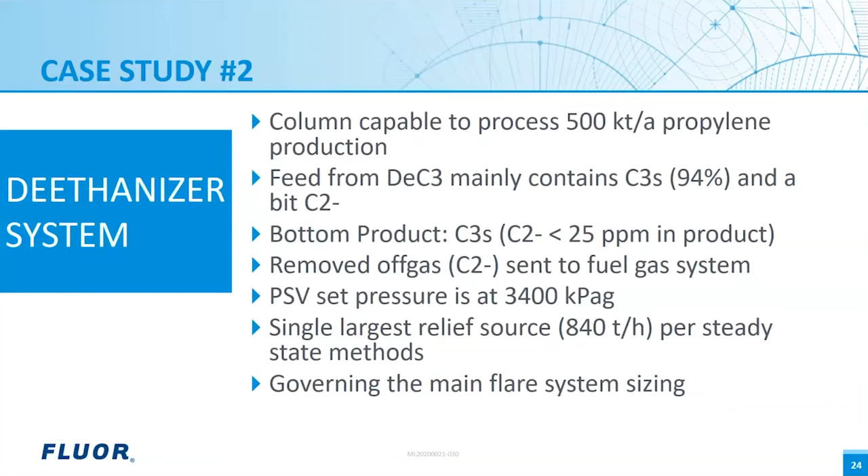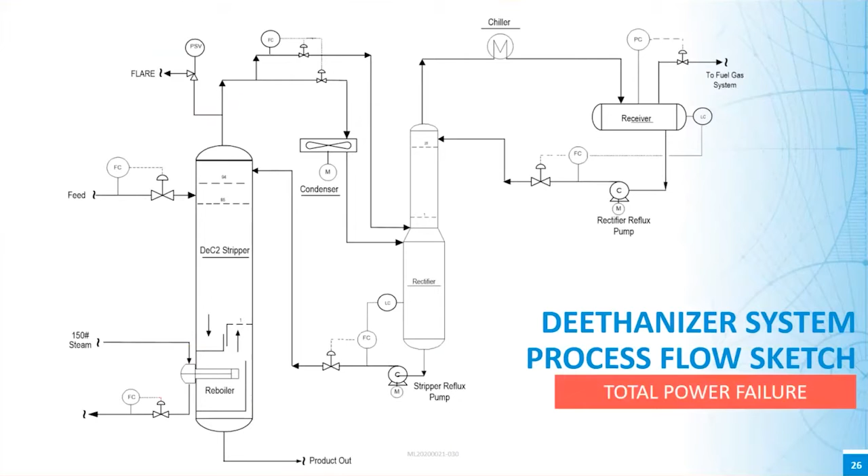Total power failure and partial power failure are also studied here, as they are identified as having the two largest relief loads by the steady-state method. Upon the total power failure, the feed stops, and both stripper reflux and the rectifier reflux stop as well. Bottom products continue on level control and eventually will stop when the column runs dry. Off-gas is assumed blocked as the fuel gas compressor is off.

Both stripper condenser and rectifier chilling condenser are lost. Heat input to the reboiler continues with thermal limitations, as the steam is assumed to continue its normal flow. Reboilers are modeled as a UA exchanger rated with a fluid circulation rate, which will be limited by the reboiler system hydraulics during the upset scenario.

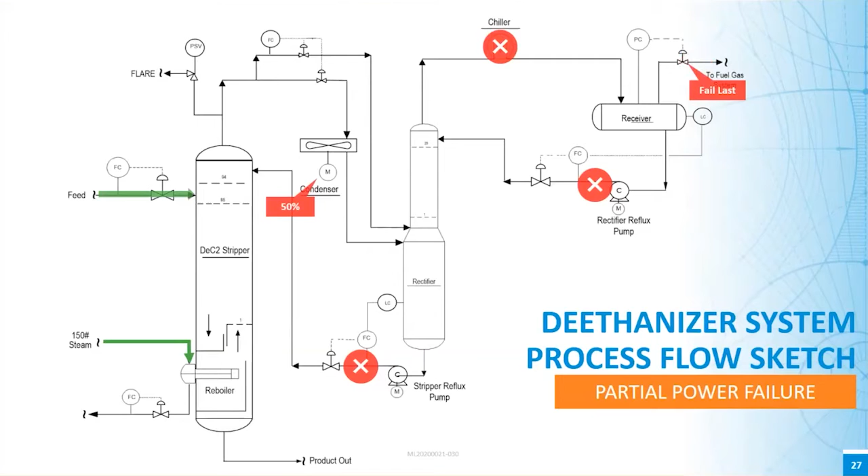The partial power failure case is assumed to have a similar upset to the total power failure scenario, except that the feed continues, as the feed pump is assumed working on partial power failure. 50% of the electric fans on the air cooler are still available for cooling the overhead vapor. Off-gas continues to the fuel gas system with a pressure control valve on fail last position, assuming the downstream fuel gas system is still operating normally.

Dynamic simulation indicates it takes about 11 minutes for the system to reach the PSV set pressure, which is 3,400 kPa. The peak relief of 288 tons per hour is identified at around 20 minutes after the total power failure event initiated. Since the feed stopped, the holdup liquid flow from the top tray section to the reboiler tapers off, and the heat input to the column will eventually stop. As a result, the relief will stop once the liquid holdup on all the trays starts running out.

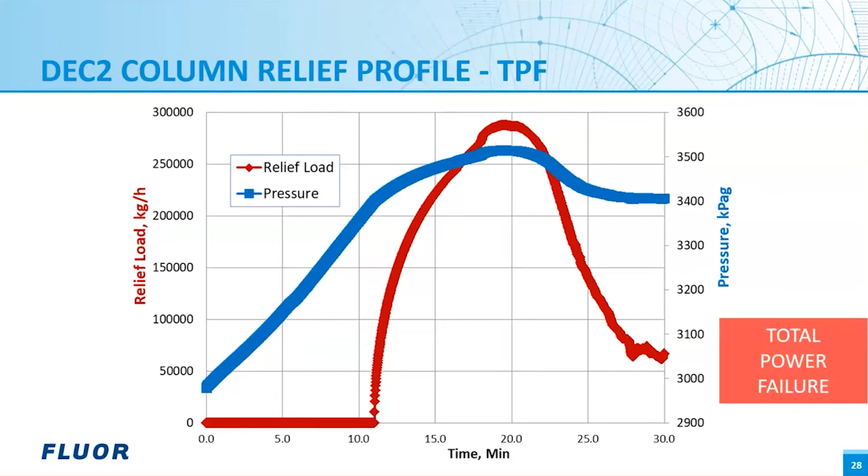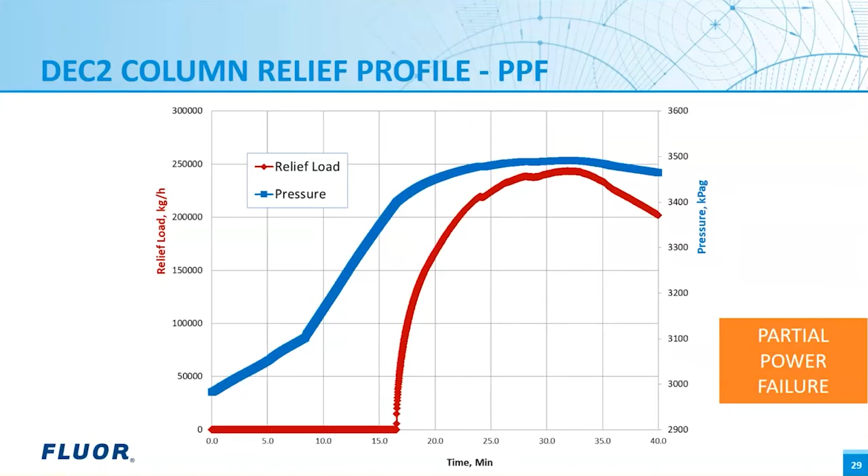The dynamic simulated relief loads are compared with the loads estimated by the steady-state method for total power failure and partial power failure. For a 500 kilotons per year propylene production, the dynamic simulated peak relief is only 1/3 of that estimated by the steady-state method for total power failure. On the other hand, about 50% reduction is achieved by dynamic simulation for the partial power failure case.

Based on the dynamic simulation, one R-size PSV is adequate to handle both total power failure and partial power failure upset. However, the loads estimated by the steady state method will call for two PSVs, one R-size and one T-size.

As we mentioned, the relief from the deethanizer column determines the dimensions of the flare system. The reduced relief loads by dynamic simulation will have a significant impact on the flare header sizing, flare knockout drum sizing, as well as flare stack sizing. The potential savings in CapEx can be tens of millions of dollars, not to mention the benefit on acoustic-induced vibration issues of discharge line and flare headers due to these reduced relief loads.

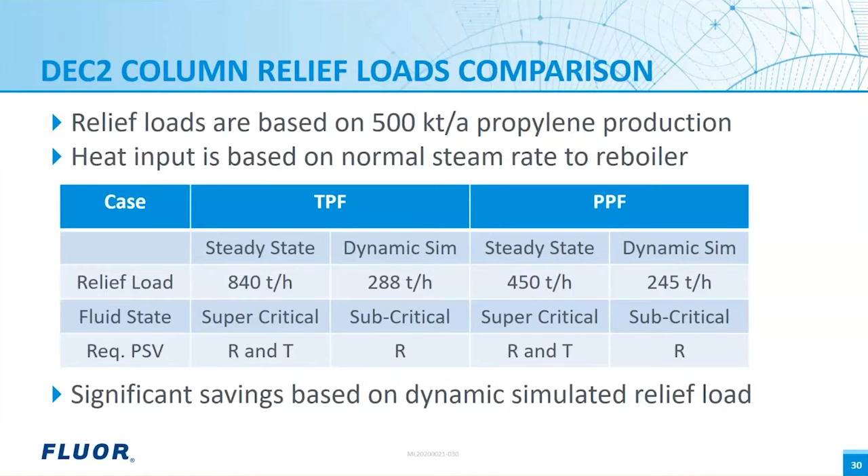The reduced relief loads by dynamic simulation are attributed to the listed advantages of the dynamic simulation. Here, dynamic simulation considers limited liquid holdup within the system. It takes credit for system volume. It simulates the hydraulic and thermal limitations of the system during the relief. Particularly, dynamic simulation indicates the relief is subcritical, where the steady state modeling assumes supercritical relief.

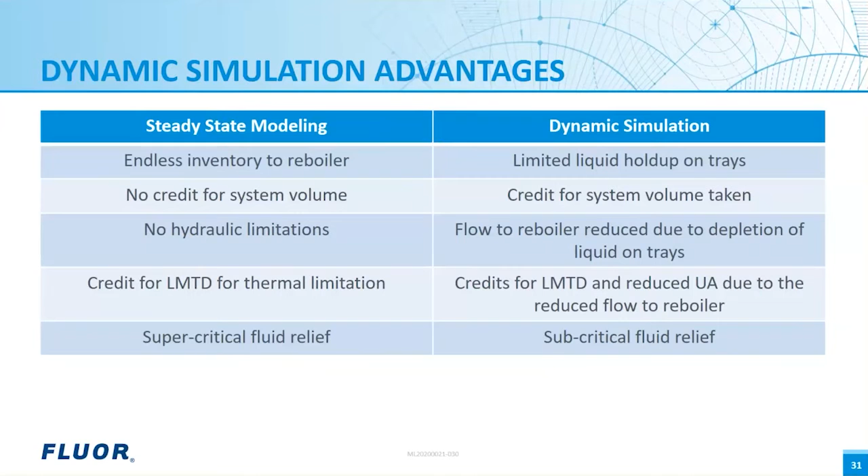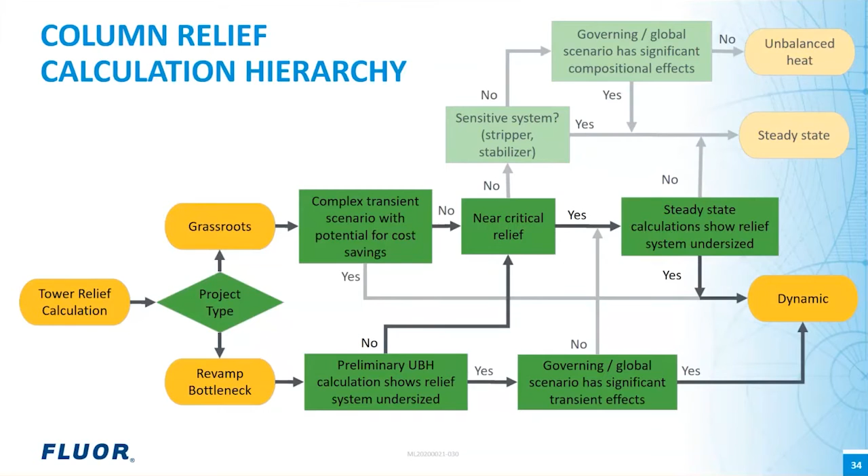As shown by the paths on the bottom section of this diagram, dynamic simulation will offer a rigorous and more accurate approach for column relief estimations. Although the method itself can be used in grassroots design, there is nothing wrong to use it. But the advantages of dynamic simulation are pronounced for the brownfield projects, where the loads estimated by the steady-state method can exceed existing PSV limits or flare limits.

To summarize, here is when and where dynamic simulation should be used. When the column system is not suitable for unbalanced heat method. When unbalanced heat method or steady-state simulation calculated loads exceed the PSV or flare limits. When the impact of the transient changes becomes important for relief loads, for example, the hydraulic or thermal limitations become significant during the relief. The relief loads estimated by the dynamic simulation are typically less than the loads by the static method, not always though. Dynamic simulation is a promising tool to ensure safe design and to save project cost.

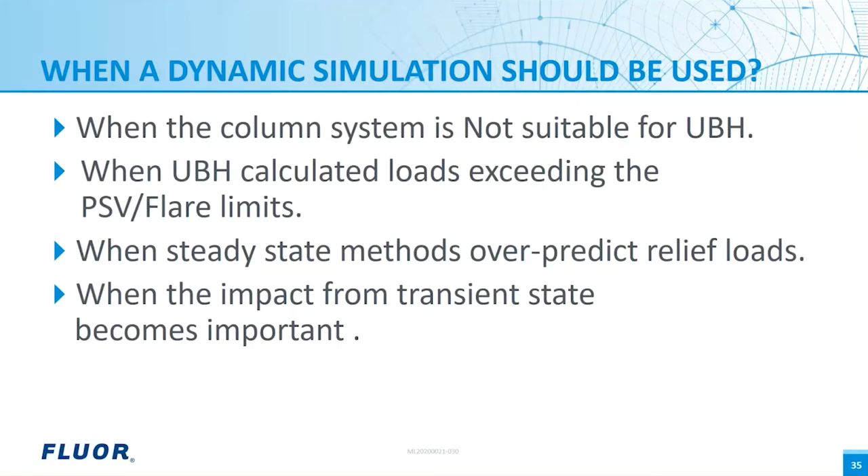For the first question, besides column relief analysis, what other applications of dynamic simulation can you recommend? In addition to column analysis, dynamic simulation can be used for many other process validations and evaluations, such as unit emergency depressuring, control safeguard evaluation, exchanger tube rupture safety checking, compressor anti-surge analysis, and plant optimizations.

A paper of mine to be published in Hydrocarbon Engineering next month will give you a good example of plant configuration optimization with dynamic simulations. In that paper, we used dynamic simulation to evaluate the stability of the high-pressure steam system for an LNG plant. We simulated different designs of the steam producers, which are boilers and heat recovery steam generators. And we modeled the different configurations of the steam users as well, which are HP steam turbines and LP low-pressure steam turbines.